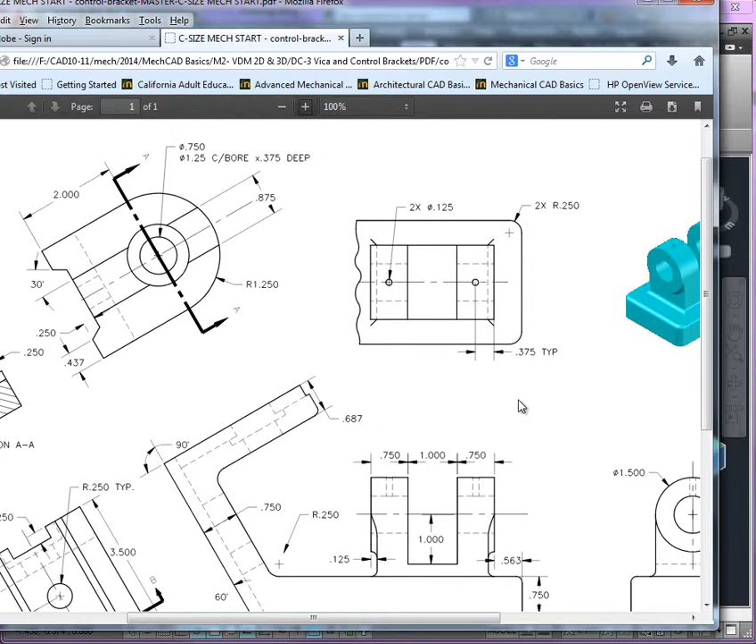If we pull this to the side and take a look at our model here, you'll see right now we've got our UCS set for the front UCS. And if I bring this back to the world UCS, you can see now the orientation of my axis.

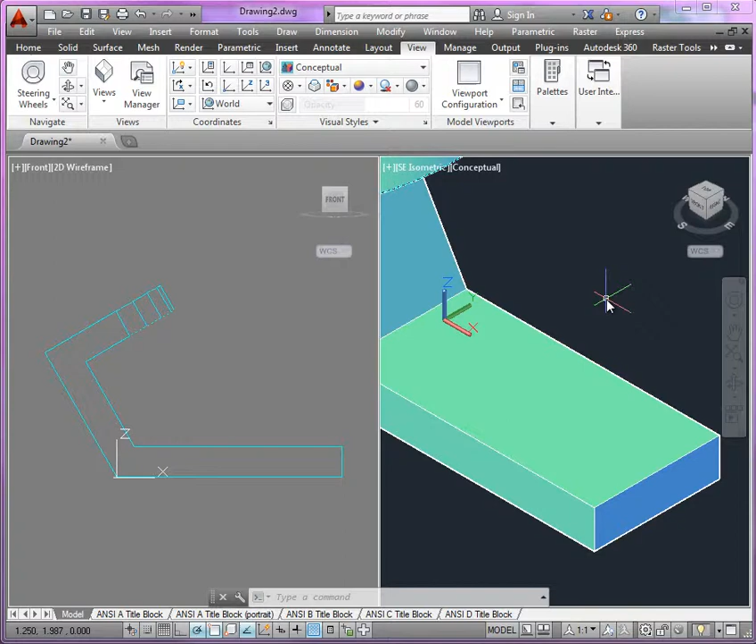Now I'm going to show you a little trick here that we can use so that we can draft without having to create a new UCS all the time. We can actually work in isometric view and use the snap modes of the different faces to draft on faces.

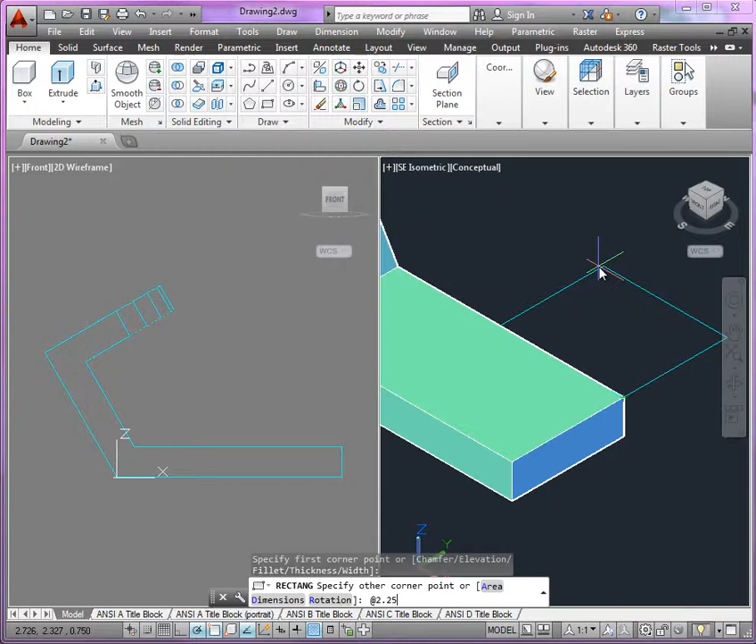For example, since I know I'm going to use a rectangle of a certain dimension, working in the isometric view, I can start at one corner here, and then using our relative coordinates, we can say something like 2.250, comma 1.500, and there's the dimensions of my rectangle.

But now, because I also have the dimensions of where it's placed, I can simply move it, and you can see physically that this rectangle is on top of that face.

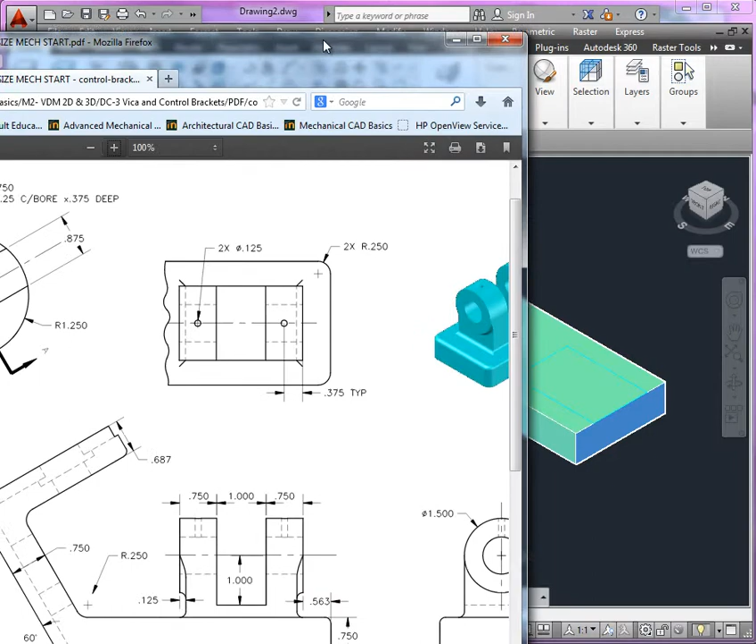So I can center it here, and if I take a look at my drawing one more time, we can see that we have a setback of 0.563, plus our 0.125 there.

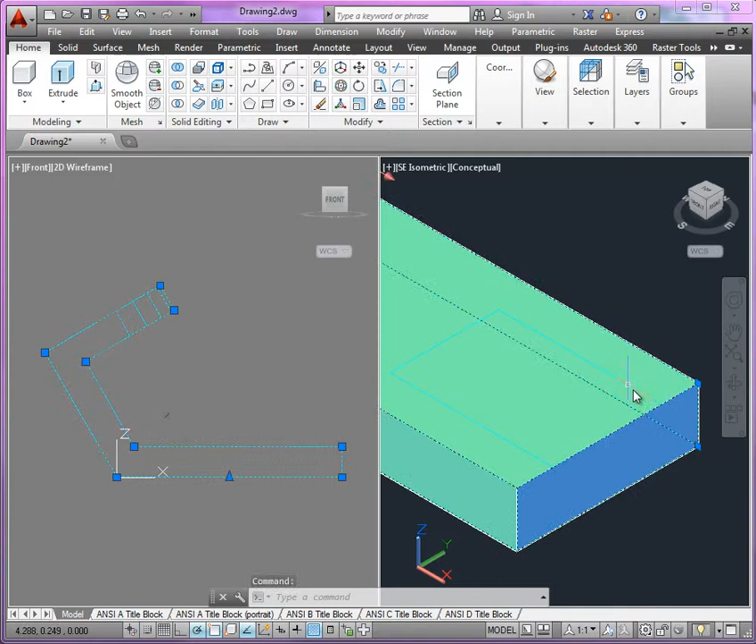And what we have here, we're going to set back that rectangle as it's centered here on the face. Let me switch back to a wireframe mode so you can see that better.

So we're going to move this rectangle back. Just use move, and again, I'm using the snap mode here for the midpoint, making sure I track along that face, along the x-axis, and I'll punch in 0.688. So that's the position of that base.

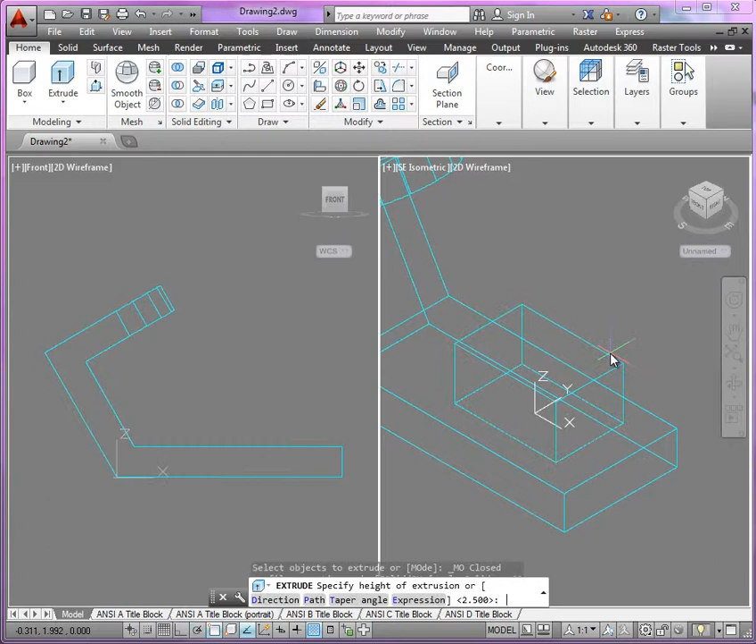Now, this is just a profile, and even when I extrude this profile, we're going to extrude it up by 0.125, and that'll represent the base there.

All right, so if we take a look at the drawing, we can see actually that we should make our boss right here 0.25. You can see I've already extruded it at 0.125, but that's not a problem because we can use our press pull tool here.

We can select the face, and you can see as I'm pulling up the face, again I can just do 0.125 for a total of 0.25. So even if you do make some mistakes with the extrusions, there is still the possibility to revise on the fly.

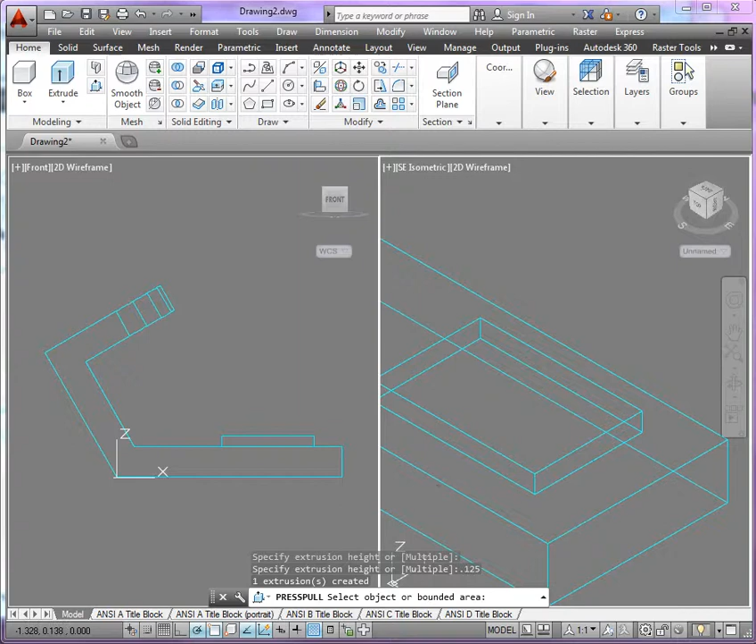All right, and now what we can see, if we switch back to a conceptual view, we actually have two solids there. Now I'm going to recommend for now, let's just keep them this way, and as I proceed I'm going to make a copy of these solids here just for now, because I don't want to start from scratch should I make a mistake.